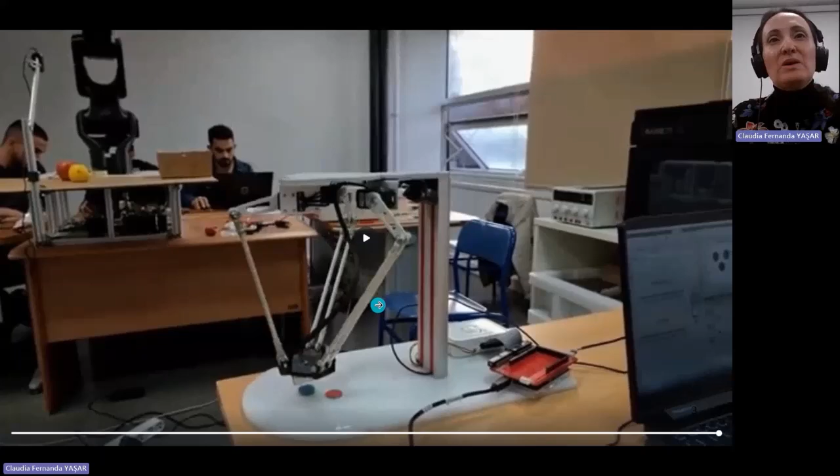MATLAB and Simulink for control and automation engineers. We are working in intelligent control, but before that, from the very first year, our students are working in programming lectures where we are teaching MATLAB and Simulink. In the second year, we have measurements and sensors for control engineers, mechatronics in the third year, process control and real-time control in the fourth year. Also, we work in system dynamics, modeling and simulation, and intelligent control in the fifth year at the master level. We are working in system dynamics, modeling, control, simulations, and real-time applications.

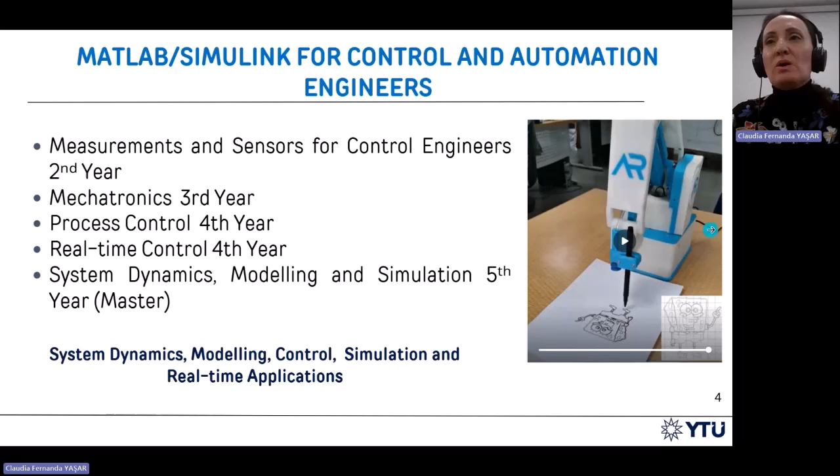In these courses, at least one of the homeworks, and in many courses, we have projects, to evaluate our students with projects and with homeworks. And we are using MATLAB and Simulink. We are working with MATLAB and Simulink in the course of intelligent control. And here I'm showing you an example of a platform coming from the Arduino engineering kit.

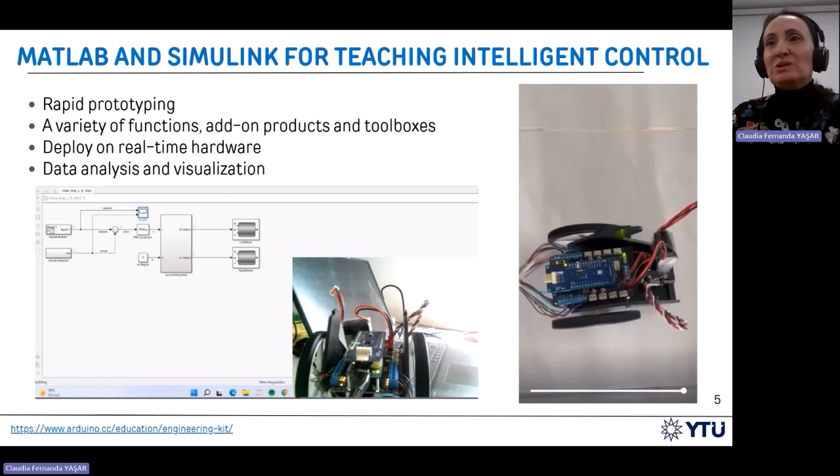We are working with MATLAB and Simulink because of the rapid prototyping, the variety of functions, add-on products, and toolboxes, because we can also deploy our algorithms in real-time hardware. We work in data analysis, and we use the visualization tools of MATLAB and Simulink. We also like MATLAB and Simulink very much because of Simscape.

The example here on the right is a motorbike, and we use Simscape for a physical simulation. Each part of the motorbike, the wheels and the inertia wheel at the top, can be programmed very easily with Simscape. For each of the joints, we can give a rotation, an input that can be ideal, or we can close some loops and test some control algorithms to make it realistic, to make it close to reality.

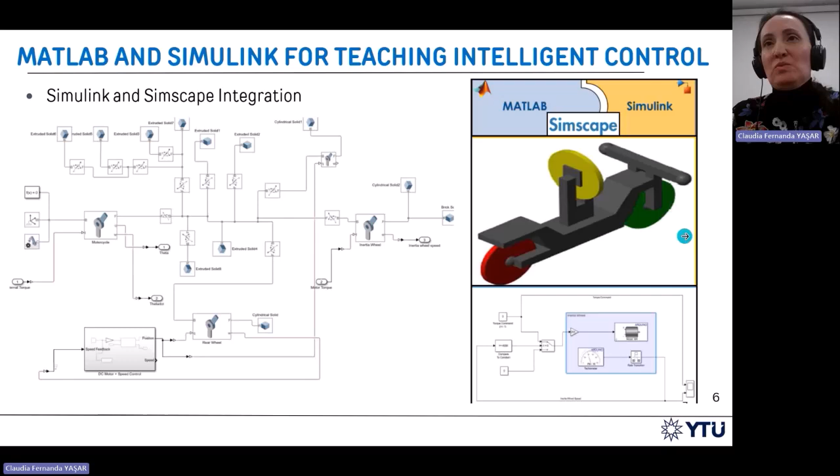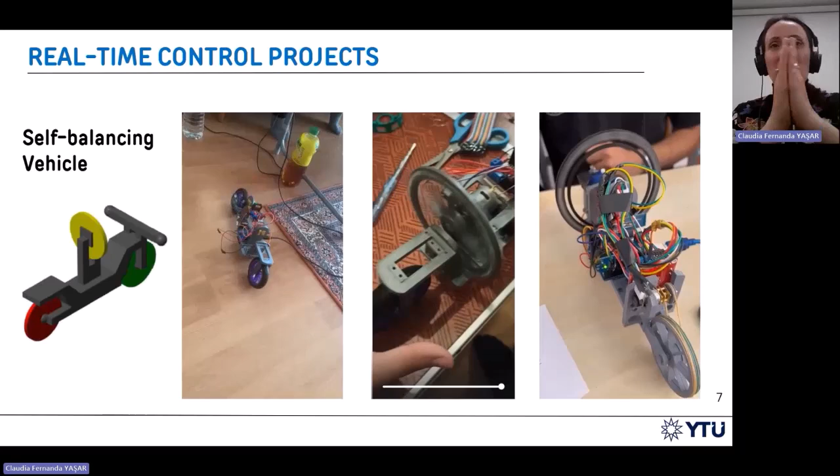After a very good simulation, we test our platforms. In this case, it's the same motorbike, but on the left, we have a speed controller. We're controlling the speed of the rear wheel. In the middle, we are controlling the balance of the motorbike with an inertia wheel, fully using a mechanical principle, the gyroscope principle. So we don't use a sensor, we use a motor, and we give full power to the motor, and we control the balance. Or on the right, we are using some sensors and some control algorithms, closed loop position controllers, to keep the balance of the motorbike.

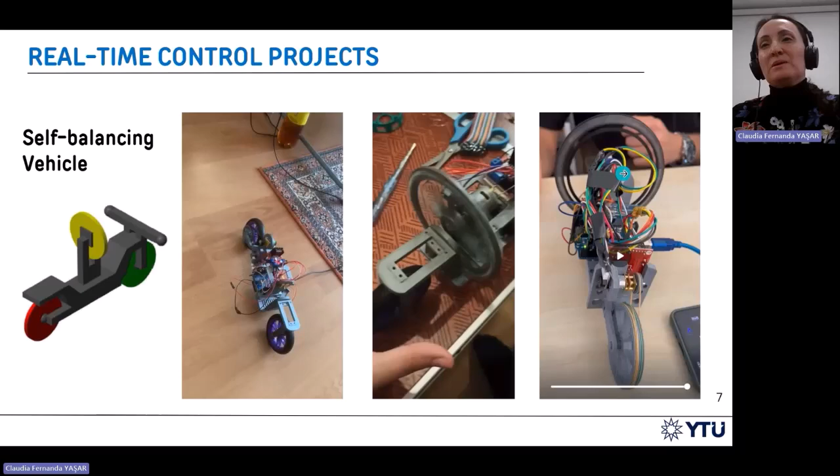Intelligent control systems. Intelligent control comes from conventional control, the classical control theory, but it's used to deal with complex processes that traditional methods cannot control. It has learning, adaptive, and organizing functions.

I have here two examples from our lab. The first example is the fixed wing aircraft. Here we have a plane in orange. This is our lab. And we also have another example of a climbing robot that we have been designing in the lab as well. When we come to the fixed wing aircraft, we are flying it on our campus, and in normal weather conditions, it is flying quite well.

But when the wind increases or there is rain, we have some problems and damage hitting our system sometimes. We should be able at least to land the aircraft, to use some adaptive controllers, at least to recover and allow it to do the landing safely. We also have here the climbing robot that uses two magnetic wheels, wheels that have neodymium magnets.

Each wheel is attached to a DC motor. So this is a differential robot that has neodymium magnets that attach the wheels to vertical walls. These forces are affecting very much when we are trying to do precise position controllers. So we have disturbances coming from magnetic forces, gravity forces.

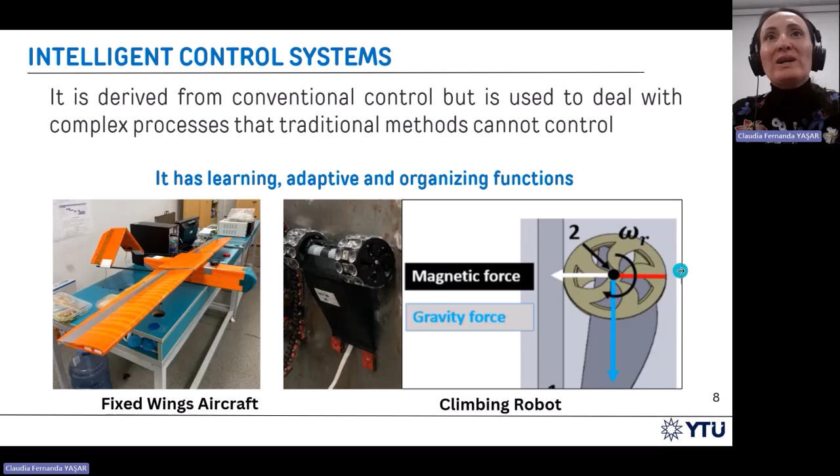Intelligent control system as a project in education. We have been working in this project, curriculum development, to empower our students with practical skills, to promote critical thinking, creativity, and collaboration. We have these students make a team, they select a project, and they work through the full

semester from the first weeks and present their project to foster expertise in data-driven, model-based, and AI control approaches, to incorporate emerging technologies, and very important, to explore new teaching methods. Our focus could be to work with experiments, bring some real-time platforms to the classroom, and of course, working with low-cost platforms so each student can benefit from it, can have it in their hands.

How MATLAB and Simulink were used in the course? We have the typical sessions, 3 hours per week, covering intelligent control system theory, and very important to evaluate control performance. We have interactive live scripts that work with MATLAB and Simulink, and many examples in it. Application-focused materials include videos, simulations, and several real-time experiments. Everything to motivate engineering-oriented analysis, problem-solving, and self-learning skills.

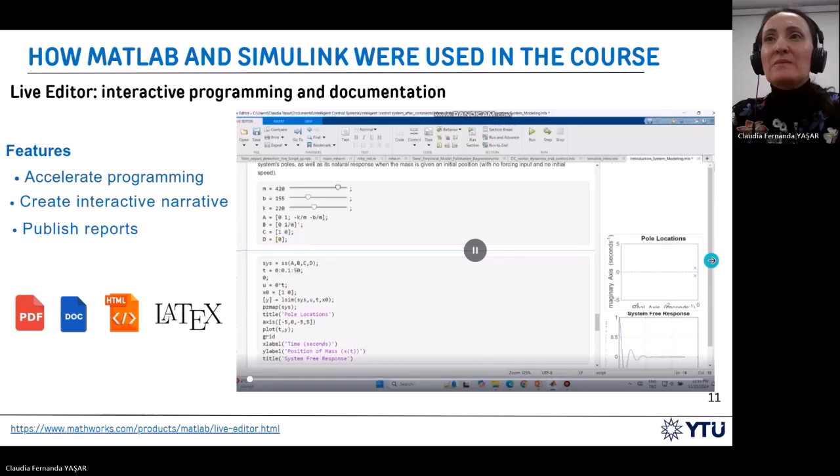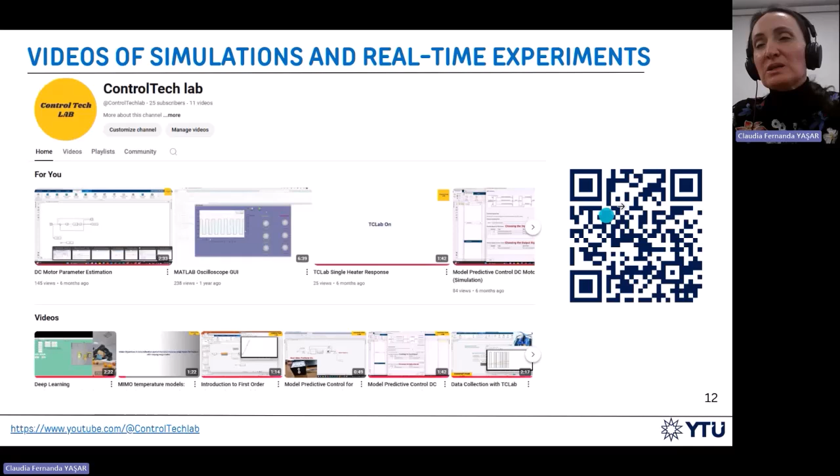The students start from the very beginning until 100%. When they reach the 100%, when they finish the course, a link is generated and they can even print a certificate. They are using those links and the certificates for their CVs, and they are sending them to the teacher also for evaluation.

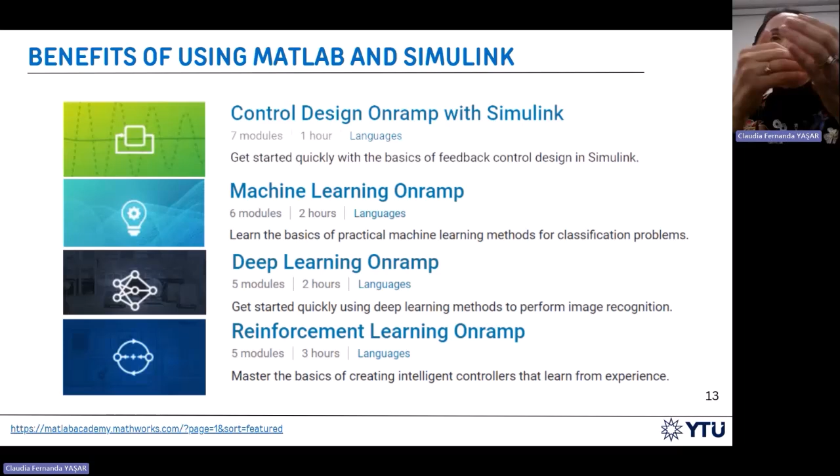We are using in the course the MATLAB Grader. With my students, we program 20 different problems. Some of them are initial steps in machine learning. Then we go to advanced machine learning problems. And finally, we have some examples of model predictive control.

They are interactive course assignments that automatically grade the students' work and provide feedback. The feedback goes to the students, and also to the teacher, for the evaluation. How does it work? We have a template. And before that, we have been working with similar problems. Then they are following some steps, initial steps.

In this case, we are programming the plant model for an MPC, model predictive controller. We have a transfer function, we write the parameters, we obtain the transfer function, numerator, denominator. Then we give some information for discretizing the model. Finally, we write prediction horizon, control horizon, and we go on and on. This is the reference solution.

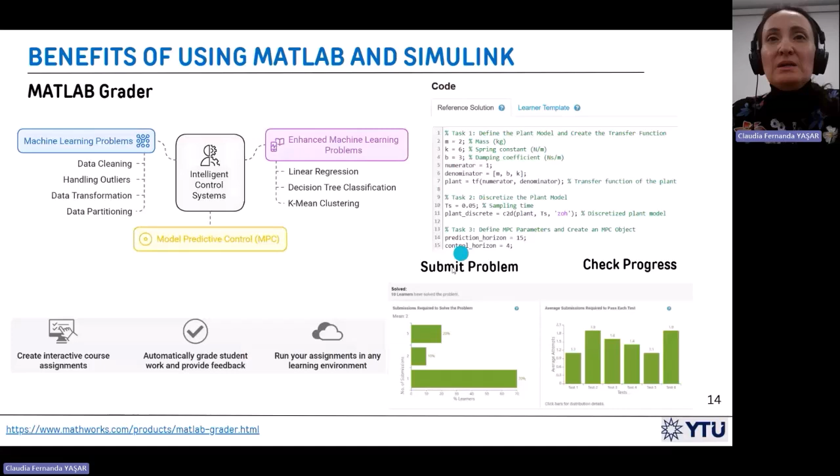We also have the student template, the learner template, where they are following step by step, and then by comparison, we evaluate the progress and how they solve the problem. They submit a problem, and we can check the progress. In this case, we see here, for example, the number of submissions of the student for a single problem.

Or we can go further, and in detail, we have divided the problem into some tasks or tests. We can see how many times the student attempted to solve this particular part, this test.

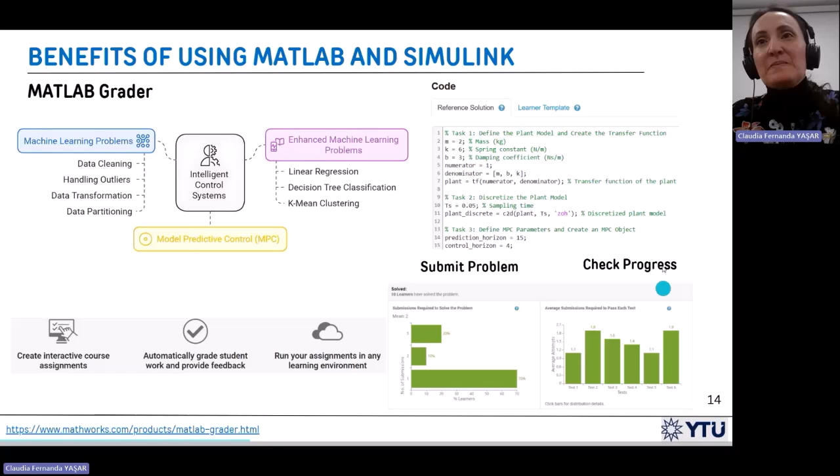All students are picking a subject from the first week. In the second week, they are writing a title of what they want to work on and present at the end of the course. So here we come to the curriculum of Intelligent Control Systems. The first week, we work with computational thinking tools, control principles, tools, methods, and we give some simulations.

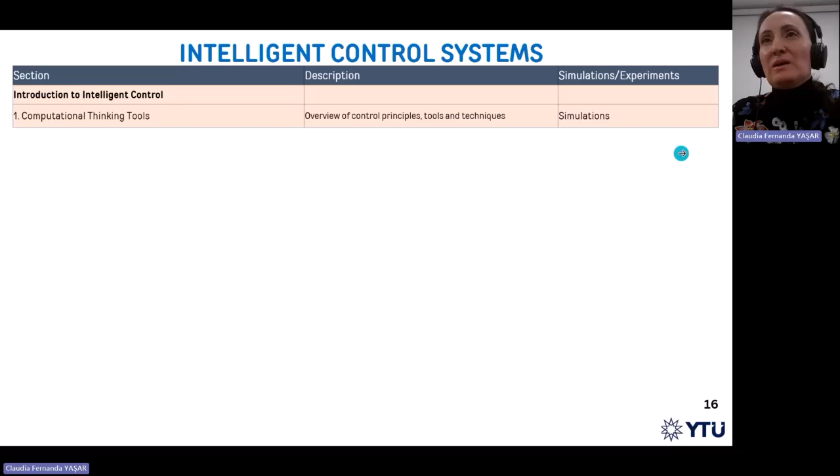The second part of the course is dynamical system modeling. Remember, this is project-based, so we have some platforms. We need at least some information about the dynamics to do model-based control, hybrid controllers. And for that, we are using the DC Lab, an experimental platform built by our students, just a DC motor, and we are performing many experiments with it.

We also have the TC Lab. This is a temperature lab. It consists of 2 heaters and 2 sensors attached to the heaters. With that, we need at least a model of the system to be used for control.

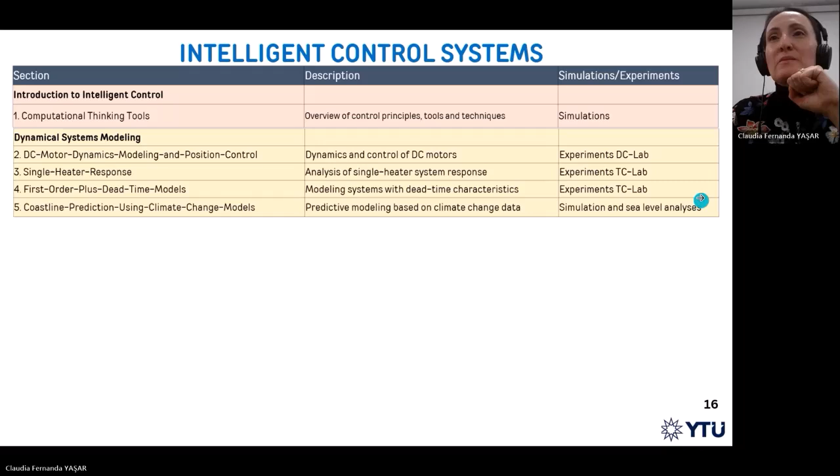We have data-driven modeling for week 6 to week 9. We are working with the TC Lab in semi-empirical model estimation, regression. We can also do machine learning classification with the TC Lab, the temperature lab. And a very nice live script is deep learning and YOLO for object classification, what we can do with a single webcam and many pictures. We are also using this classification for a robotic application.

In week 9, we have an example of interoperability, Python and MATLAB, and LSTM models for prediction and forecasting. So we are modeling, training and testing some LSTM model algorithms. We are optimizing it, using historical data, the temperature data of a particular city, and then we are running some algorithms. The data is already available on the internet.

Finally, we go to model-driven and data-driven control, model predictive control for a DC motor with experiments, model reference adaptive, extremum seeking, and the final week, we do DC motor position with fuzzy logic controllers.

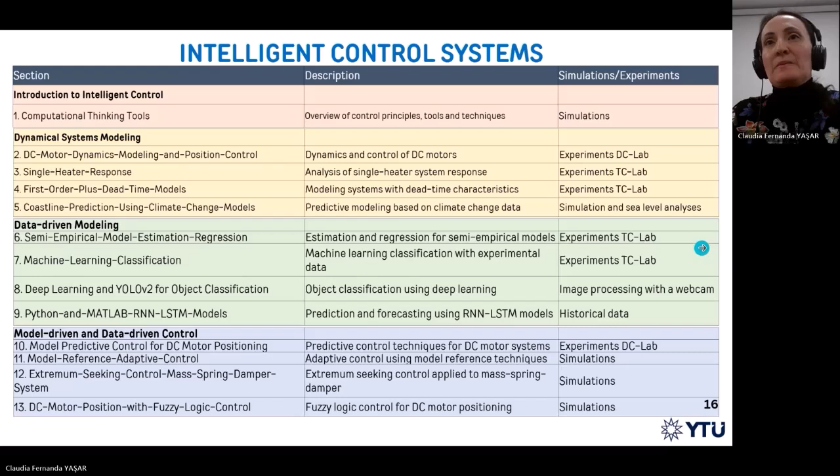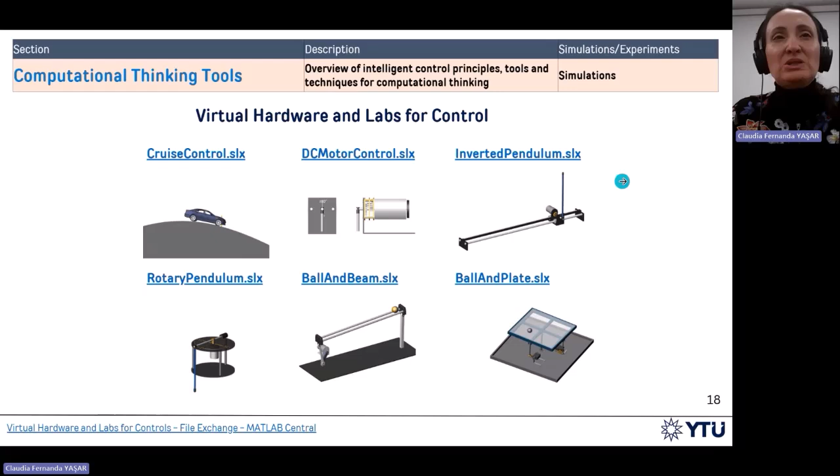Very important for us in the course is computational thinking tools. Here I'm showing you some examples. The virtual hardware and labs for control. You can find it in File Exchange. It has very well-known projects in control, like the cruise control, inverted pendulum, the ball and beam. These are done with Simscape. You can explore inside, try to make changes in the dynamics, some parameters, and run some controllers using these applications. So you can also have the robotic work.

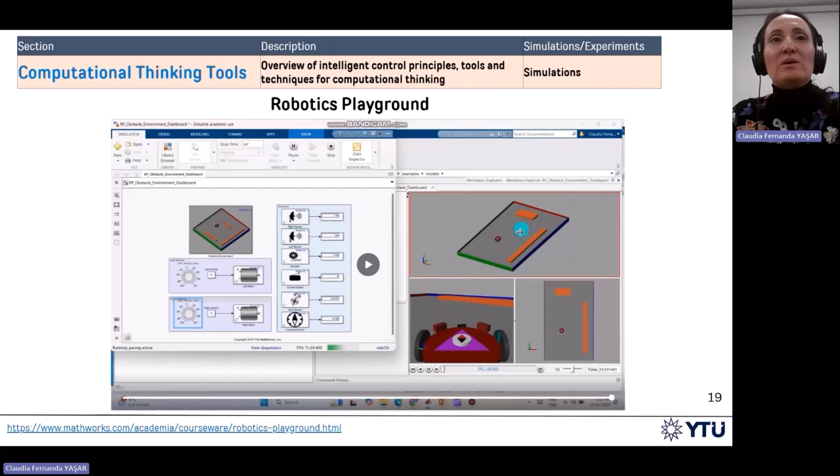For example, my students are working with the Robotics Playground. In here, we have a differential robot, a robot that has 2 wheels, and you are programming them independently. And then you have also the kinematics, the inverse kinematics, and you can program the velocity forward, backwards, the turning, work with the playground, put some objects, and then test some algorithms by controlling each of the motors.

Dynamic system modeling.

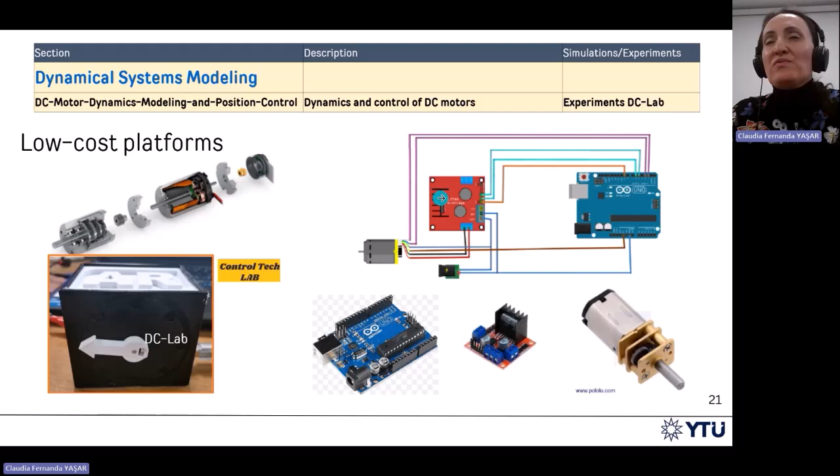So I'm showing here a low-cost platform, the DC Lab platform. It is just a single DC motor with an encoder. Some of them are coming with the gearbox as well. And we packed them in a box. It has an Arduino Uno and an H-bridge. And with this platform, we are performing a lot of experiments.

Having a model and having the parameters, we can go and, for example, tell the students, oh, we need a position controller and show me a critically damped response, the best response that you can have, the fastest, without overshoot and minimizing the static error, the error at the steady state.

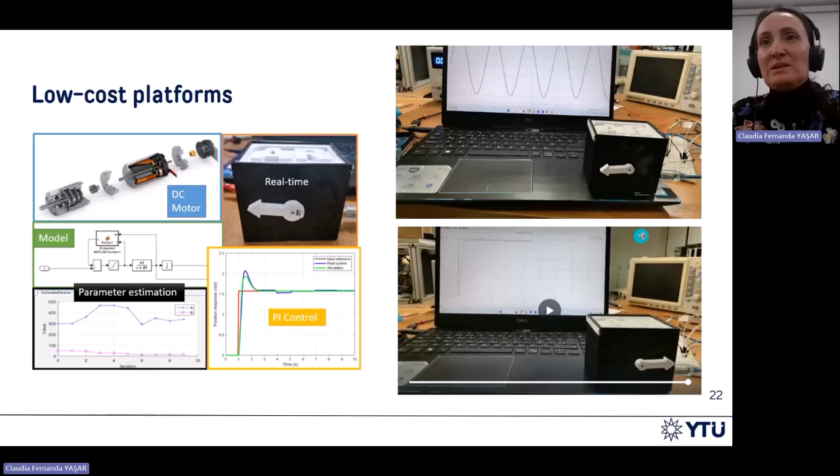In here, we can work in dynamic response, temperature response per each of the heaters. We can also do for both, so multi-input, multi-output, a MIMO system. And we can also work with heat transfer. Have a look how one heater is affecting the second heater. You can also build this platform in your lab with your students or buy it.

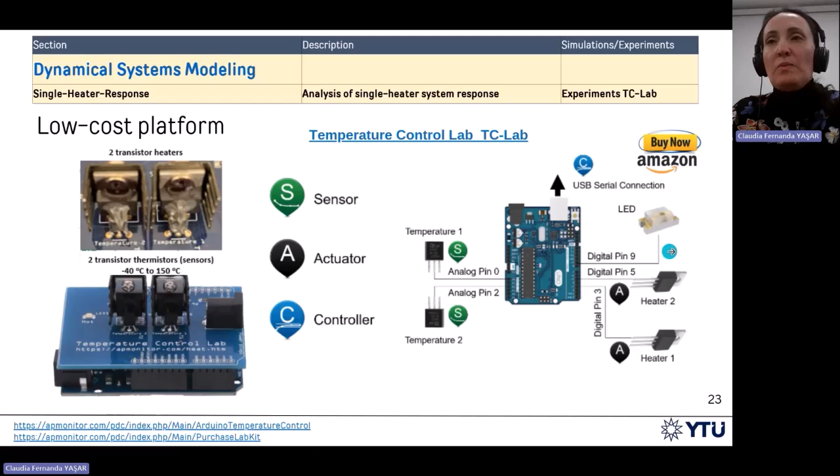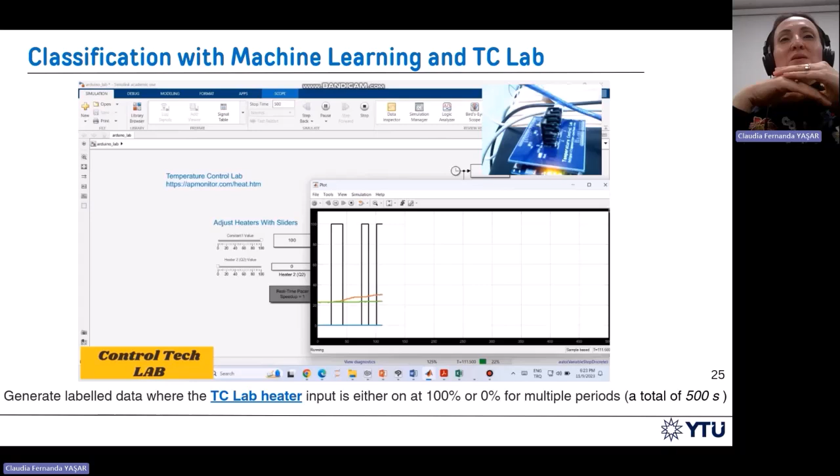Data-driven modeling. I'm showing classification with machine learning and the TC lab. Remember, we have two heaters and two sensors. We are measuring the temperature with two sensors. I am going to perform an experiment for 500 seconds. The black line that you see there is the manipulated variable. I am changing that PWM from 0 to 100%, and then switching on and off the first heater. I'm doing it multiple times.

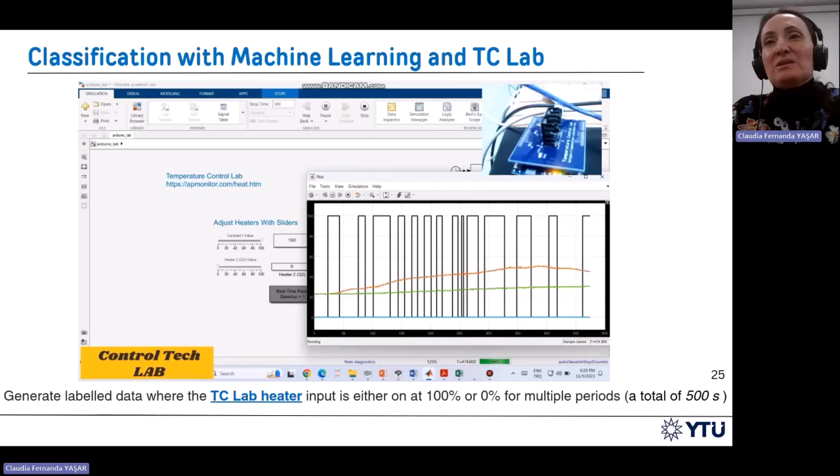Then you see the orange line. This is heater number 1, the one that I'm switching on and off. And the green one is the temperature in the second heater. This was switched off totally, but it gets some temperature because of heat transfer. We can use that data and use, for example, the Classification Learner. And here there is an option to test many algorithms at the same time. And then we can have a look in terms of accuracy, which one performed the best.

We see that for this particular experiment, the fine tree was the best. If you check, it's 97.3%. There is some more information that you can obtain, error rate, prediction speed, that can be very important if you are going to use something in real time. We can also go and check the validation confusion matrix, how we have classified.

In this case, we are classifying when it was on and when it was off. We can see the true value when it was on and was classified as on, and when it was off and was classified as off. And then we can also see some problems in here, some misclassification. Once we run this classification learner and we choose the best algorithm, the idea is that our students can take that fine tree and program a fine tree for this particular application.

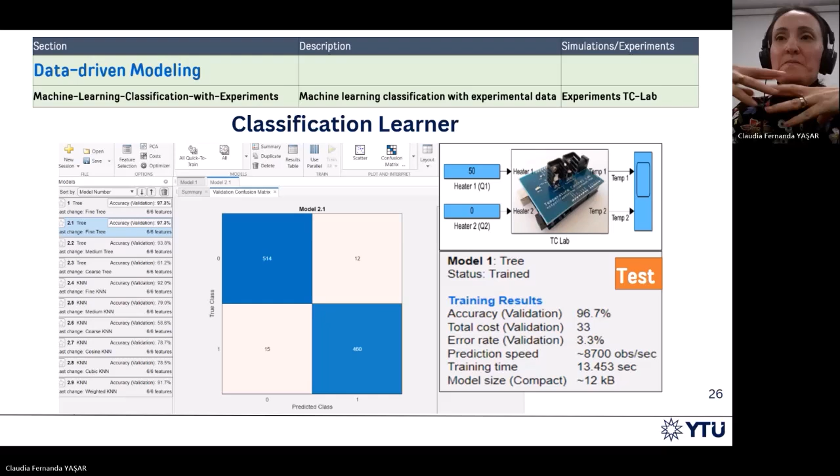More about data-driven modeling: deep learning for object classification, image processing with a webcam, and the use of YOLO. We are classifying between apple and orange. This problem has been solved and is in File Exchange, and I know that MATLAB already has some trained algorithms. We have collected many pictures and we have trained it by ourselves. We have been doing the training, testing, and validation, and we use it for a real-time application for pick and place in our lab.

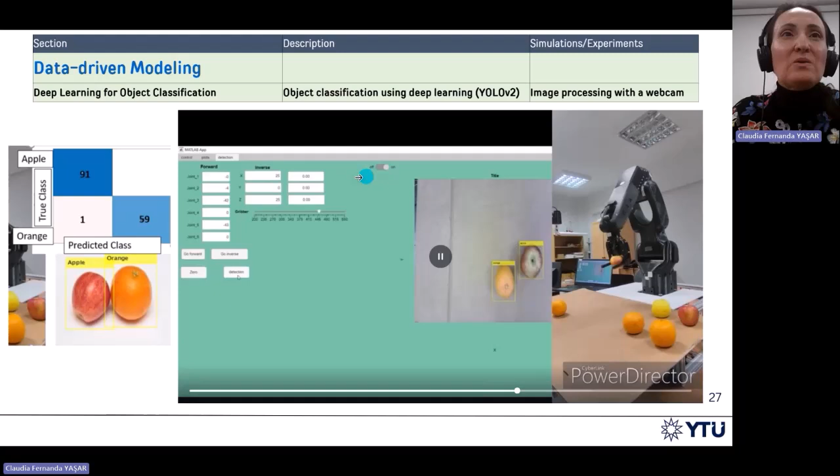In here, we see a robot. Everything has been done in our lab, the mechanics, the gearboxes, the control, the sensory system. We had a camera. We did the deep learning algorithm by using MATLAB and Simulink. And also this visualization tool interface is done with MATLAB and Simulink. It says MATLAB application. So this is an example. We are sharing this example in one of our live scripts.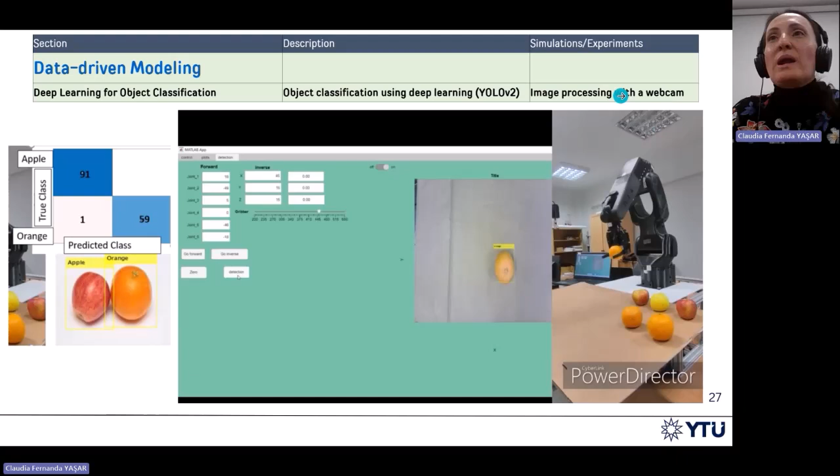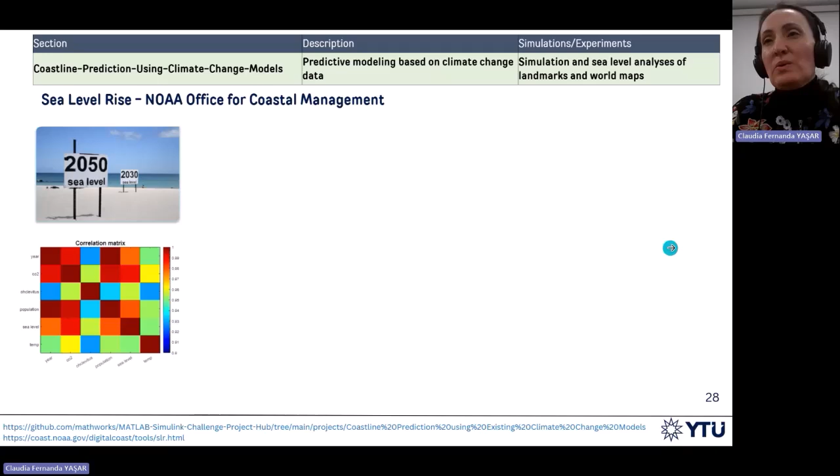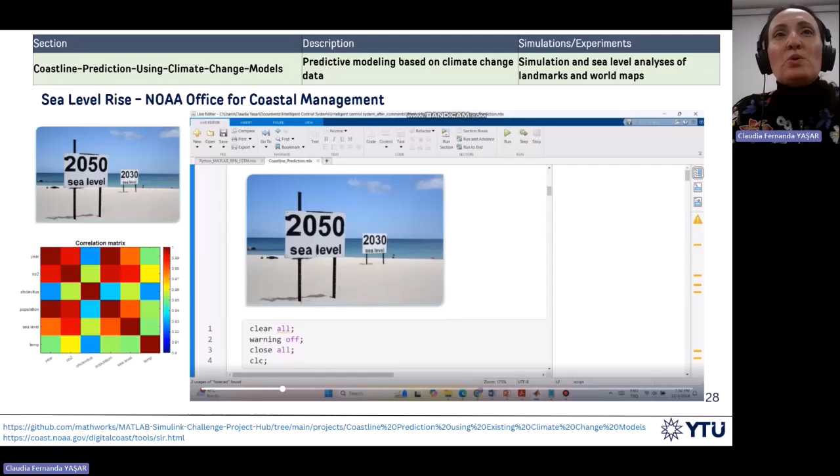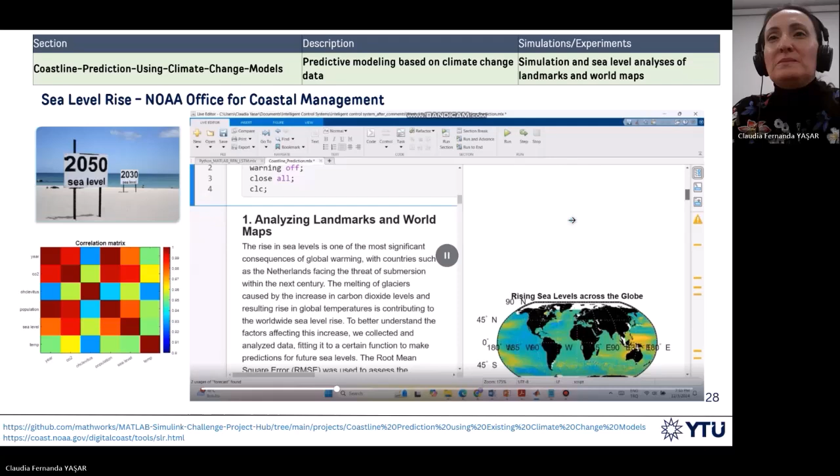So we can use that information, we can run some algorithms and compare to their predicted models. Here in our live script, we are going to show some landmarks and world maps, how they show the information. We are going to do some polynomial fitting, and then compare to their models, analyzing landmarks and world maps, the sea level rise in millimeters, with information from the 1960s until 2020.

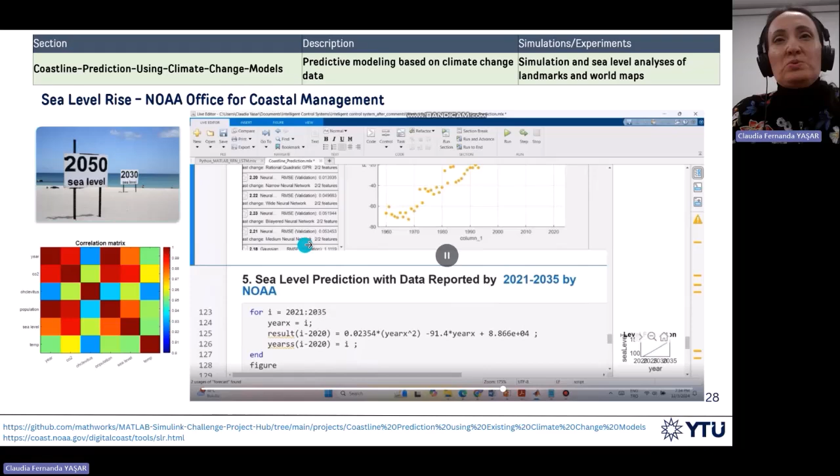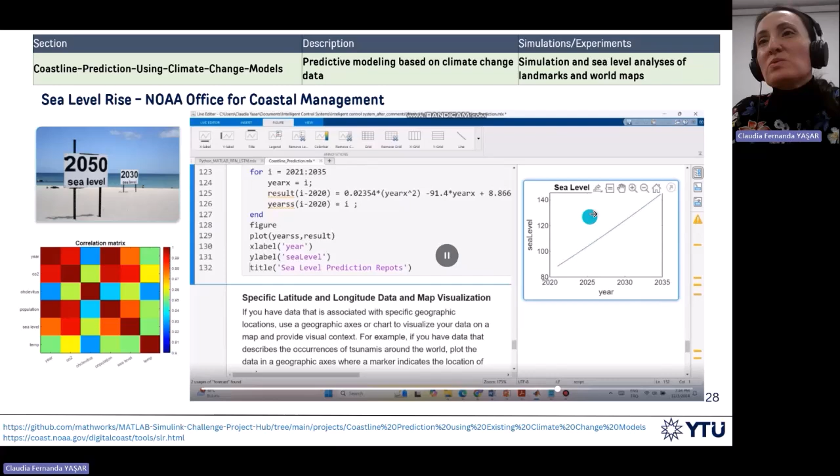Then we try some polynomial fitting. Then we can also use the data of the sea level and go to the Regression Learner toolbox. We can check some models and choose the best. In this last part, we are using the sea level prediction and the data reported from 2021 to 2035. I am plotting it.

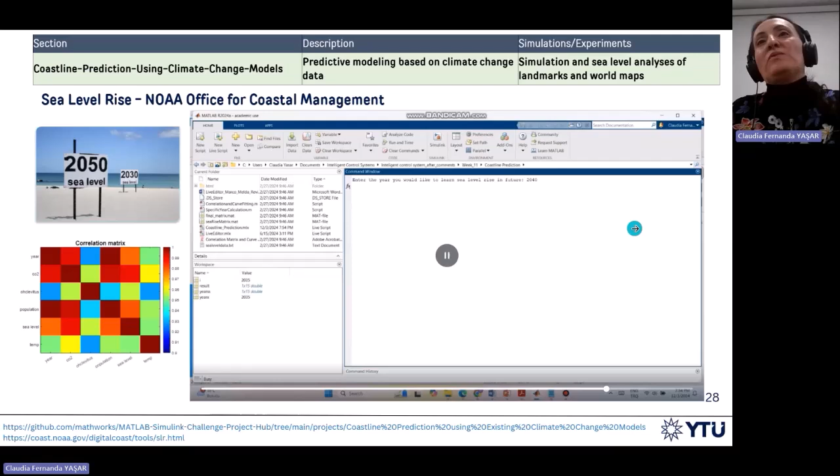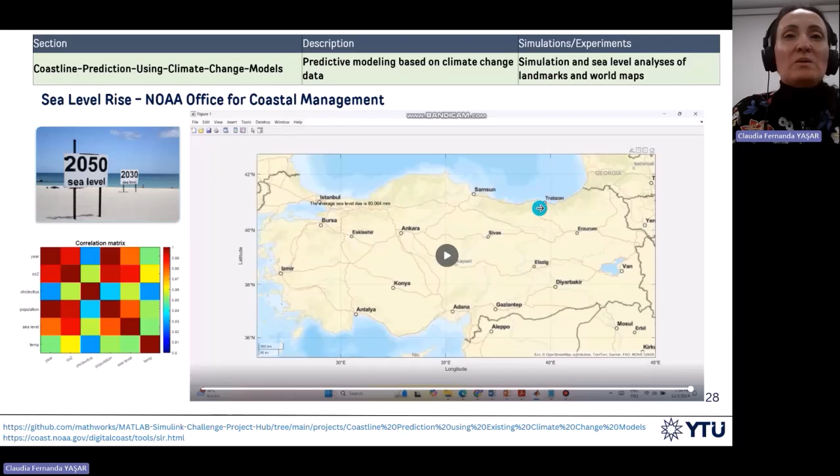Because I have the models, I can also say I want to see 2040, what is going to happen, and I can choose a place. In this case, I have chosen Istanbul. And then it reports the sea level rise in millimeters. So we can use the information that is already online for

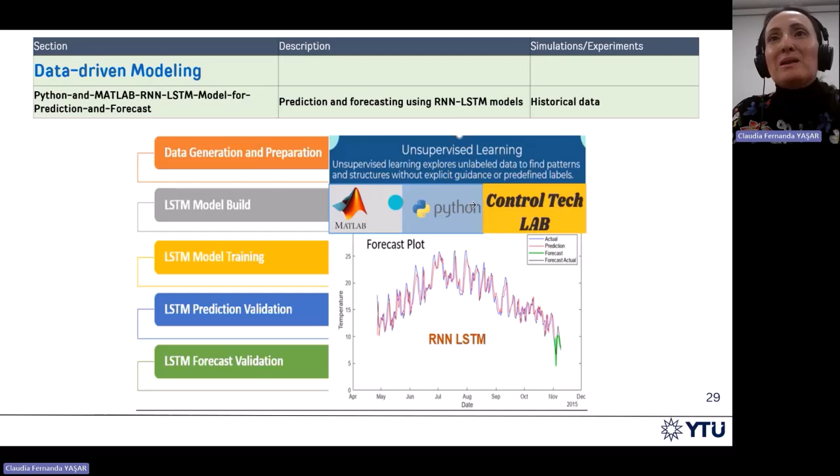algorithms. Data-driven modeling, the use of Python and MATLAB, and LSTM models for prediction using historical data. Historical data that is coming from an internet database and is the temperature in a particular city. Then we work with data generation, preparation, we build the model, we optimize the model, we do the training, prediction, and forecasting validation. A very good example of interoperability between MATLAB and Python, and an example of unsupervised learning.

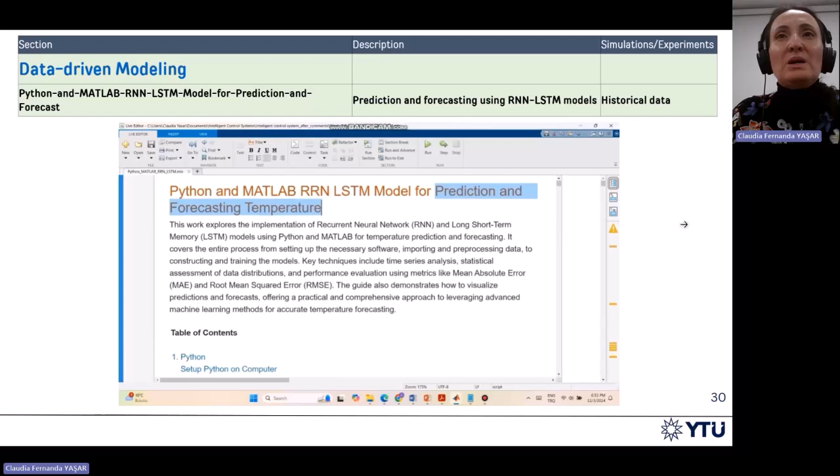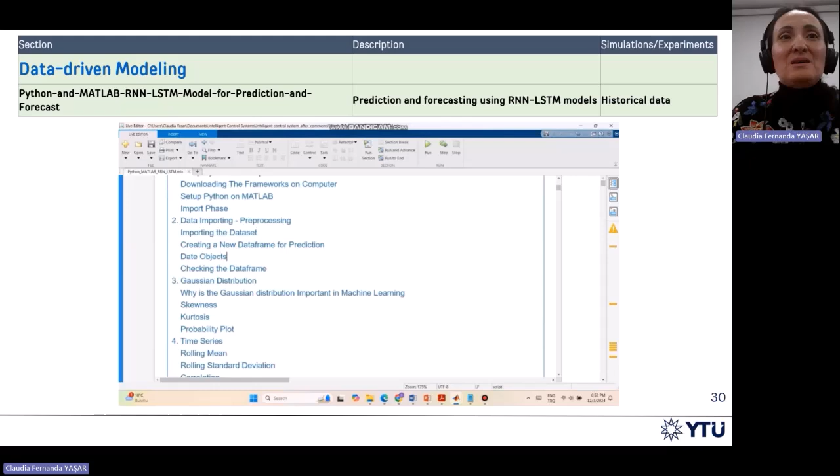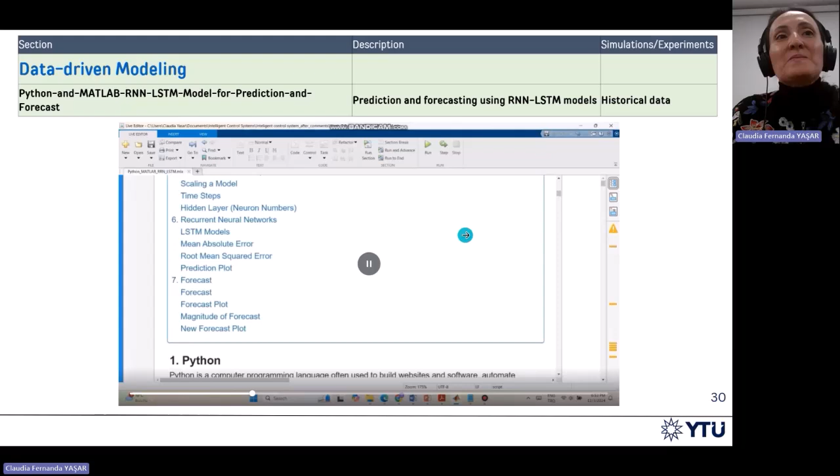Here is the live script. I'm going to show you more or less what we are doing. Important, how to work with Python and MATLAB together. Importing the data, processing the data, seeing if the data is Gaussian, some statistical tests. We are working in time series, doing the training, testing, the validation, working with the prediction plot and the forecast plot.

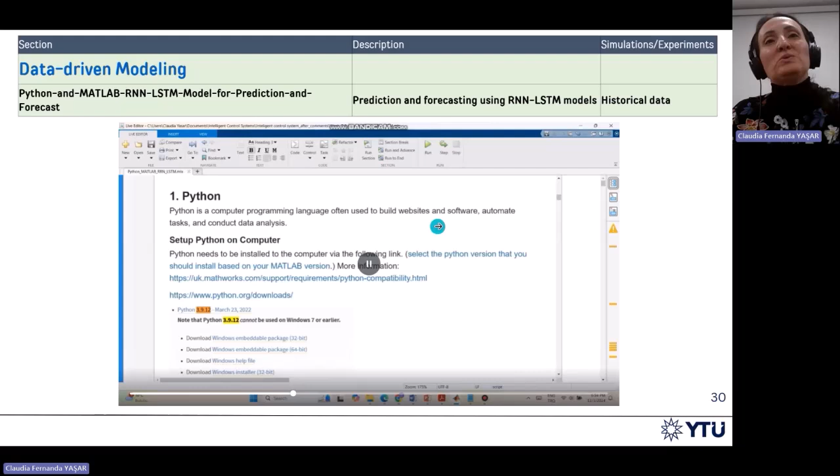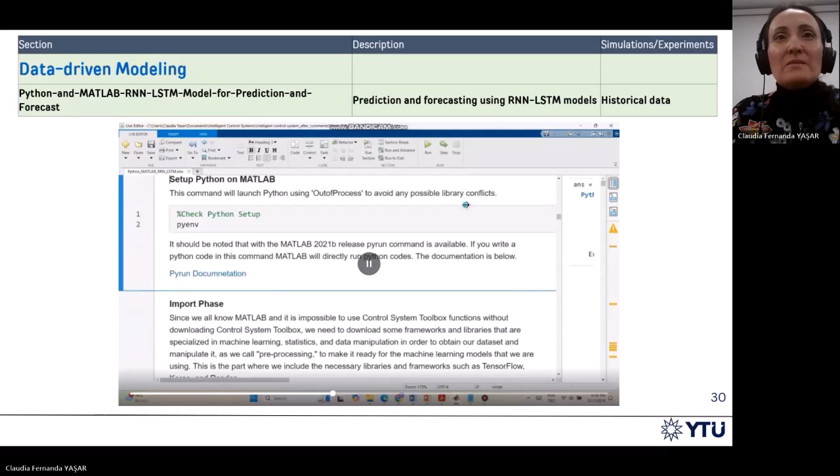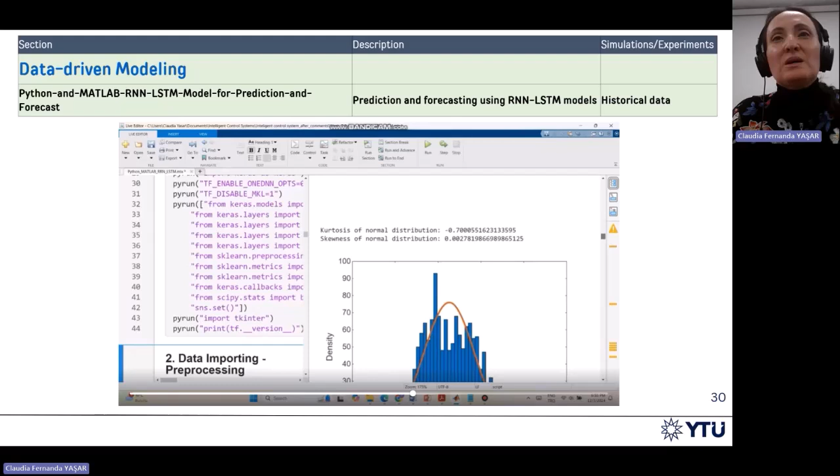In here, we guide the student step by step on how to obtain all the needed programs to run the live script, the libraries, the data. We are importing and processing it. Then we see if it's Gaussian, we get the normal distribution, temperature distribution, probability plot.

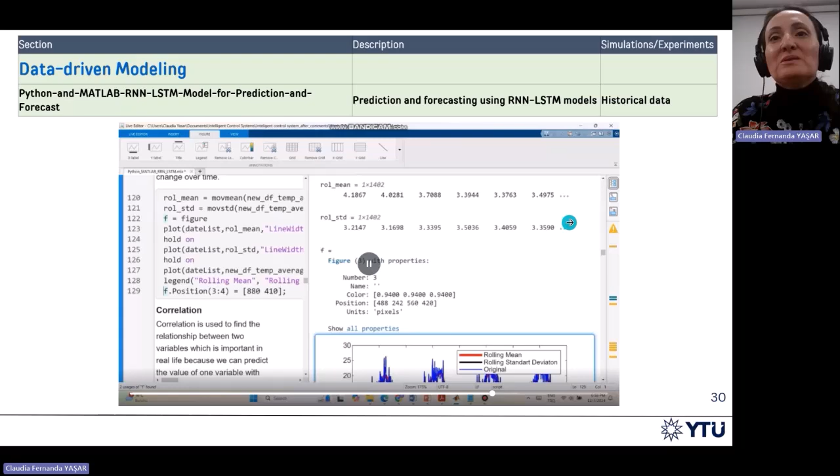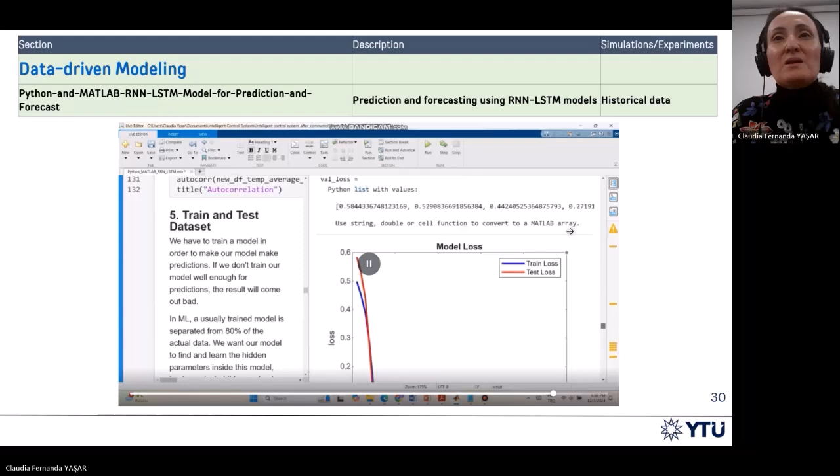The time series, how it looks from 2012 to 2016. Then some statistics, rolling mean, rolling standard deviation, just to see some trends. Autocorrelation test. Then we are going to do the training, the testing. We finally have the prediction plots and forecast plots where we compare actual, predicted, and forecasting. And we are forecasting some days ahead in November.

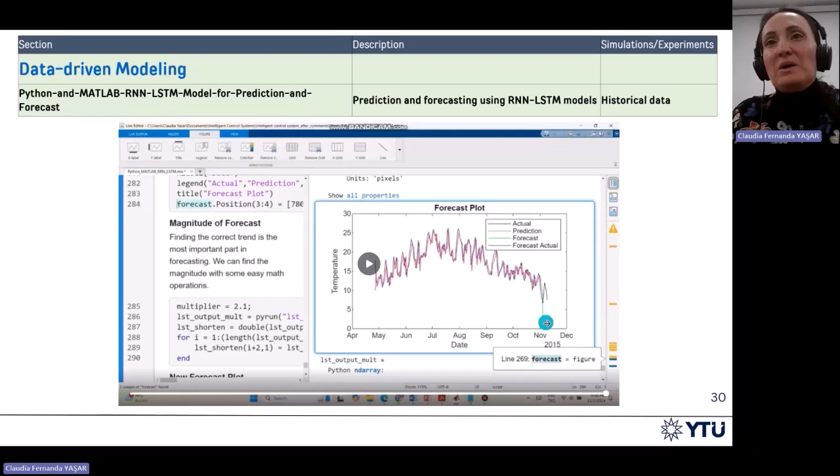Model-driven and data-driven control. In here we have model predictive control for DC motor positioning, and we are performing some experiments. Remember that before we were working with dynamics and a reduced model of the DC motor, and we also have the parameters. So we can easily use the Model Predictive Control Toolbox and do a linear model predictive controller. Then we can simulate it, and we can also perform experiments, put them together and see how close they are.

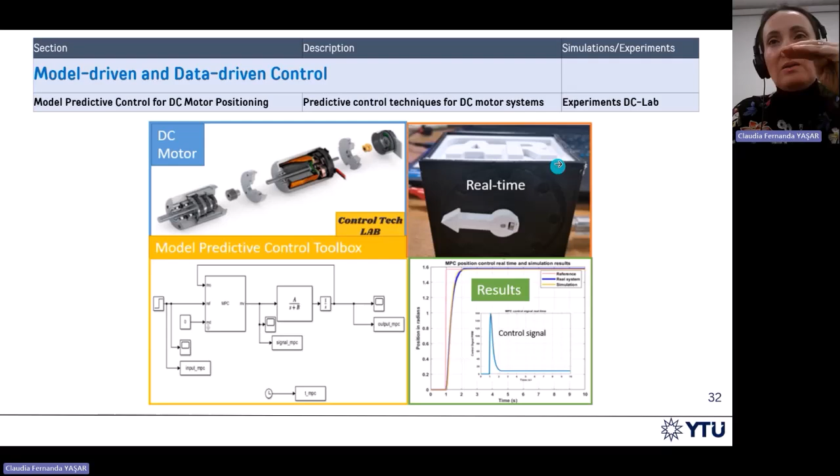And very important, always watch, plot, and keep that control signal so we don't saturate, and we are always working under the limitations, the boundary. Here is an example, a video of that linear MPC.

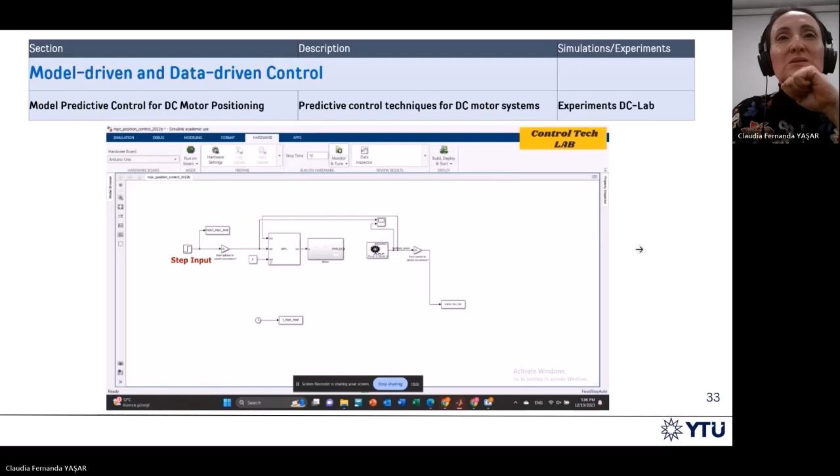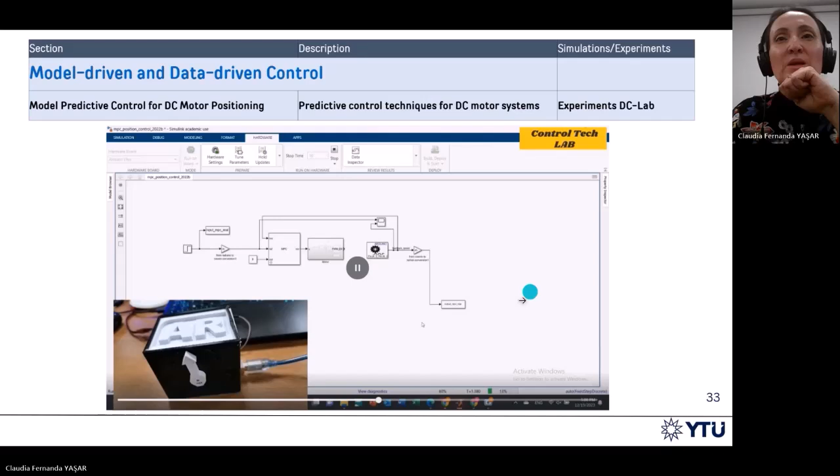System response, a position controller. Then we are comparing the response to a step input, real system in blue, simulation in yellow. It might not be noticeable, but there is a little error in the blue one. There is a static error still, but they are pretty similar.

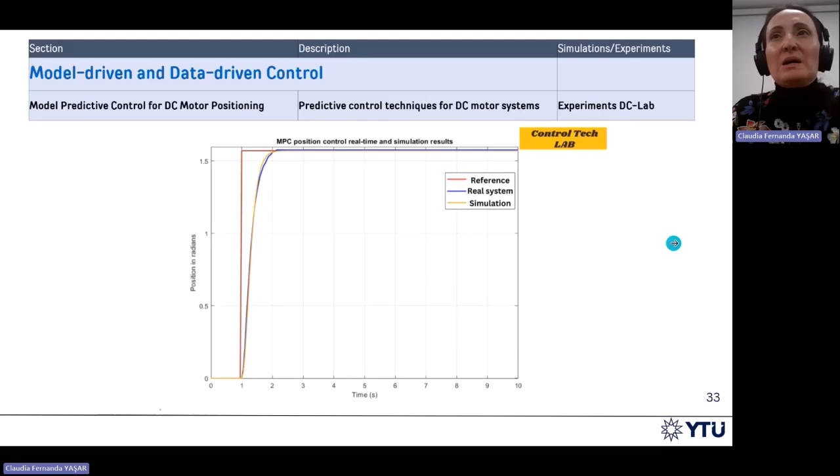So after that, many live scripts, weeks, projects, what our students are telling about, how they are evaluating our work: student feedback, educational tools. We are asking our students, can you rate your MATLAB Grader experience? Can you rate your Onramp experience in a new topic like AI? And they can select among easy, expected, and complex.

Or we are asking, in your opinion, is using a live script an effective method for sharing educational material? Here, all of the students say this is successful. We have tested this program in 2 semesters. This is now the 3rd semester we are doing. We didn't finish yet. And we have 63 students in these 2 semesters.

Project-based learning, student projects. In general, how do you grade the overall success of students' final projects? So many of them say it is successful, many of them say it is average. Answer to the question, what do you like the most about AI in MATLAB? 50% of the students say they like the Onramp materials, and 19% that it is easy to learn AI, some others integration with Simulink, a wide variety of applications, apps and Simulink.

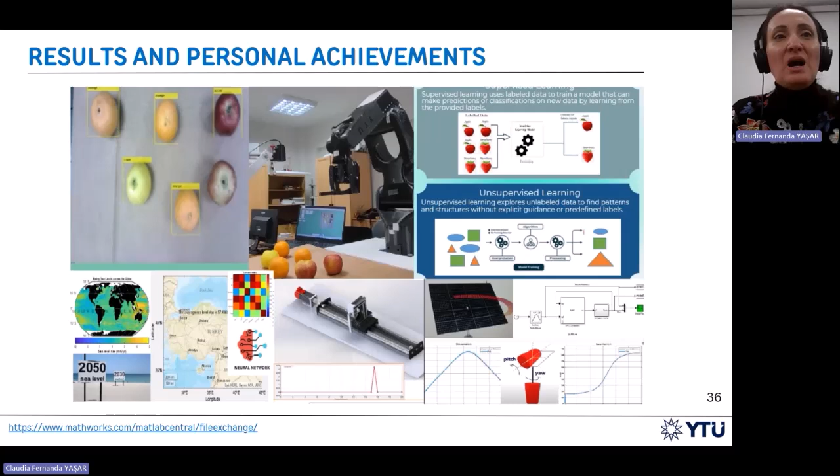Results and personal achievements. So our students are working from the first week in a project, and they have to present in the last week. We are selecting the best projects. We tidy, we make it better, and we share in File Exchange. And then they also get a certificate that says that they have the best project in the course of Intelligent Control System, the name of the project and the student, and it is certified by MathWorks.

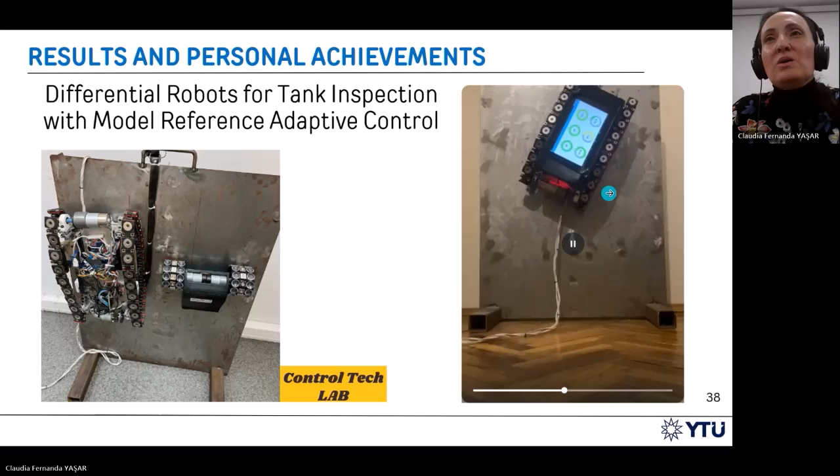We have been working quite a lot in algorithms, which we have been using also in projects. On the right, we see a climbing robot with magnetic tracks, a differential robot, and we have simulated this robot fully with MATLAB and Simulink. Before getting the project, we presented all the simulations.

Here on the left, we have again the robot without the tablet, a differential robot, 2 motors. And then we have a small one. This is with the magnets. Here it is magnetic wheels. We have applied model reference adaptive control in this robot in real time, and also we have the simulations.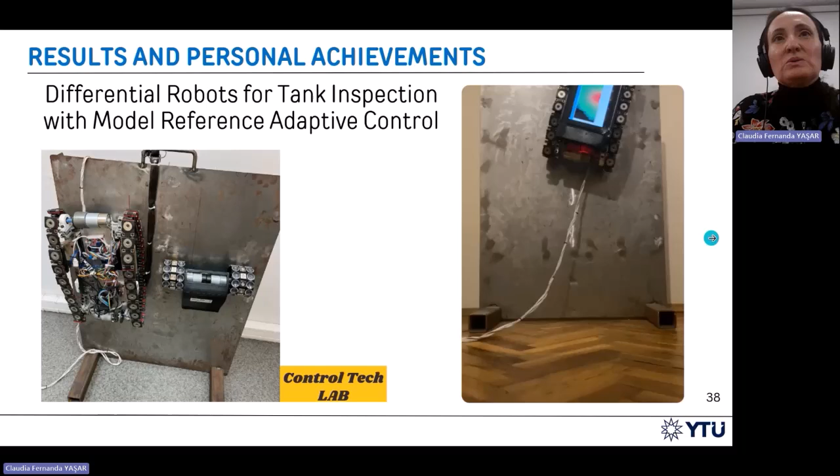Remember the live script where we were predicting and forecasting temperature. In here, we have another variable. We have optimized our algorithm and published a journal paper. Another very good paper was in Multimedia Tools and Applications. This is the work in climbing robotics. So climbing robots for corrosion inspection, IoT integration, deep learning, and advanced control strategies.

We have presented at international conferences, 3 of them. One of them an IEEE conference in Poland, where our work was selected to be in the journal. We also have in Turkey a community very active working in control. We present our works in the top conference. They work with the International Federation of Automatic Control. And we have 4 conferences in 2 years. This is the work we have done with our students.